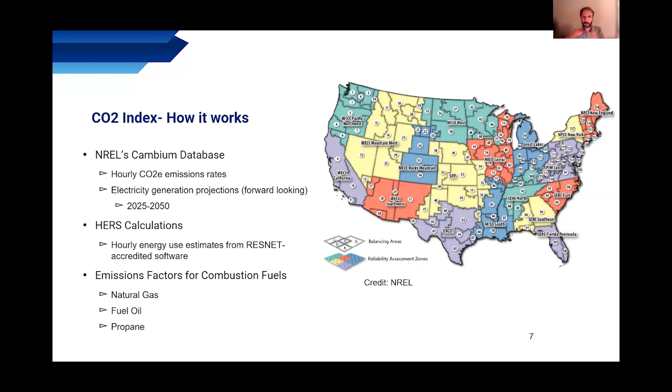So I see there's a mention here of forward-looking under NREL, 2025 to 2050. Yeah. Is the intent similar to how you might project out energy costs, like we get those projections into the future for mortgages and stuff?

Is that to say, hey, if the grid continues to go the way it is, it's going to reduce energy? Yeah. So when you look at the Cambium database documentation, you'll see they have a number of different scenarios. So in terms of what we use for the CO2 index, we use the low renewable energy cost scenario, and we use the levelized month-hour long-run marginal emission rates.

So the long-run marginal emission rate for CO2 is the forward-looking projection. They're anticipating under a number of different scenarios, including high-cost renewables. Maybe renewable energy is not going to continue to decrease, but say it increases. They use these different scenarios to estimate what the emission rates will be under any given set of circumstances. So for example, if we chose to use the short-run marginal emission rates, we would essentially be predicting CO2 emissions based on the current makeup of the grid.

So what the Cambium database does is project out under different scenarios what the grid may look like in terms of the makeup of different fuels, whether it's natural gas or nuclear or various different types of renewable energy. What does the grid look like, and what's the impact on the emissions based on that? So in our case, we're using the 2021 Cambium database, and we also include both the pre-combustion and the combustion in the CO2 emissions. So pre-combustion is going to account for extraction of, say, natural gas, processing, and transport. And then, as I mentioned earlier, the 134 regions that they refer to as balancing areas are included in that.

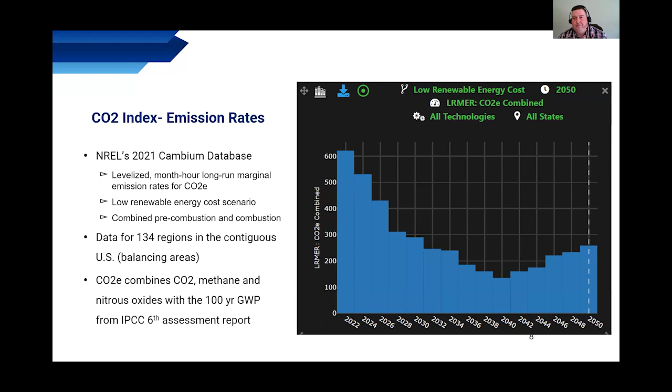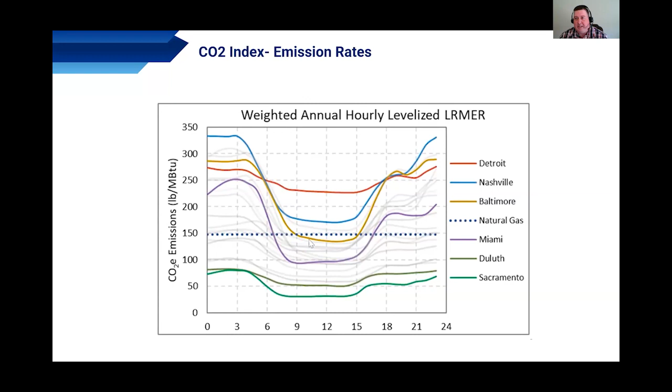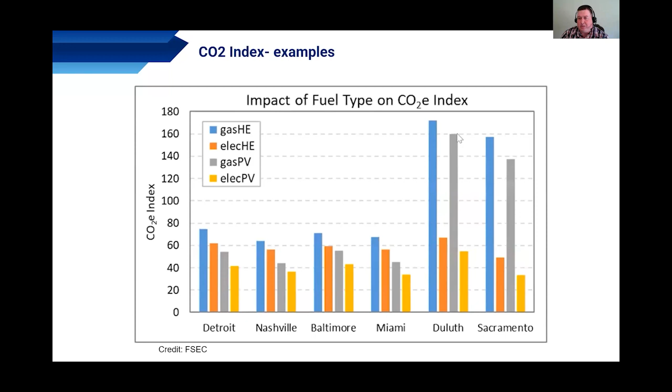And so when you add in the natural gas component, which you saw right across the middle at 150 pounds per million BTU of CO2 emissions, you can start to see how the use of natural gas in those areas that have rather efficient grids in terms of CO2 emissions really significantly increases the impact on the CO2 index. So this is an example that was modeled by FSEC in terms of actual implementation.

So RESNET software is still implementing the CO2 index. I expect that it will probably be... we can go look and see how these homes are performing on the CO2 index, because it is going to be required to be included on the rating certificate for every rating.

So it will be a data point that we have on every HERS rating in the registry. And essentially, to calculate the CO2 index, it's the CO2 emissions of the rated home divided by the emissions for the reference home times 100, and that gives you your CO2 index.

Now, I also want to point out this new rated home label on the right side of the screen. RESNET just launched this in March. It's available for every home in the RESNET registry, and it'll give you your index scores for the HERS index, for HERS H2O for water, and also the carbon index. And it'll also identify what ratings and certifications the home has.

And also, I noticed a few of you from Passive House. The PHIUS certified project will be a certification that's added to this. It's been added to the label now, and it should be implemented fully within the registry in a few months. So for homes that have achieved the PHIUS certification, that will be included on this label as well.

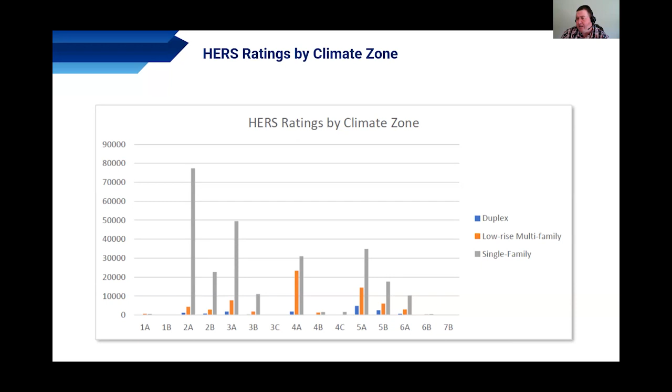So again, we're looking at duplex, low-rise multifamily, and single family, with the largest number in one climate zone going to be 2A, and a significant percentage of ratings within climate zones 2 and 3. So in general, HERS ratings are going to follow the trends in new construction. Where there is a lot of new construction happening, there tends to be a lot of HERS ratings. One data point I don't include here is the breakdown of new construction versus existing homes. Typically 95% or more of HERS ratings are on the new construction side.

Yep. That's really surprising. But overall, what's the nationwide percentage? So nationally, if you look at the number of ratings against the number of permits issued, I think it's around 20 to 25%. The reason we do this analysis based on permits is because it's readily available data from the Census Bureau. It's not the perfect comparison though, because a HERS rating gets submitted to RESNET when the home is finished, versus a permit obviously comes before the home has been started. But we've been using it for several years because the data is readily available.

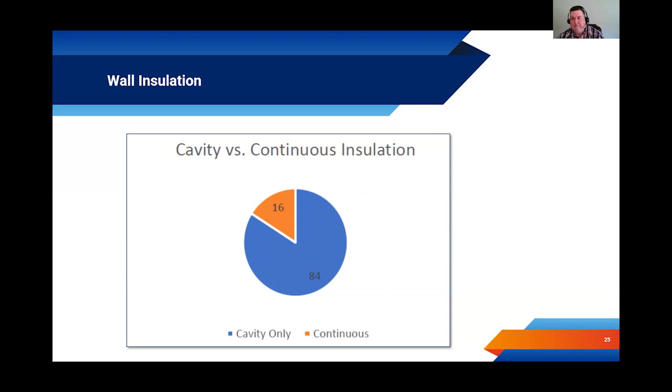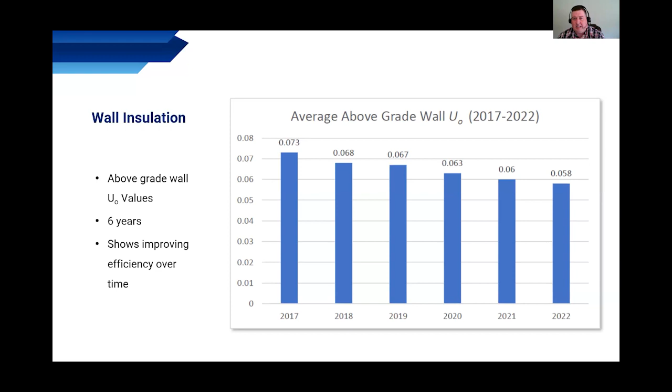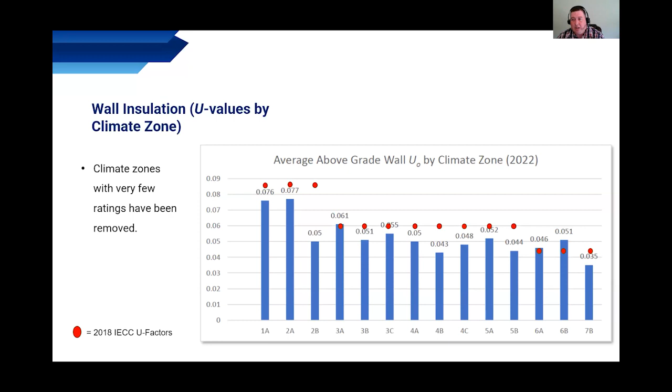Here's a similar look, but this is breaking it down by climate zone. The red dot that you see on each of these columns is going to be the 2018 IECC U factor requirement from Chapter 4. I've provided that just as a point of reference because we're looking at an entire climate zone. We don't know what specific state they may be in or what code might be in effect when this home was built. But this is just a look at where the average wall U value falls in the different climate zones and in comparison to what the code would require in that climate zone.

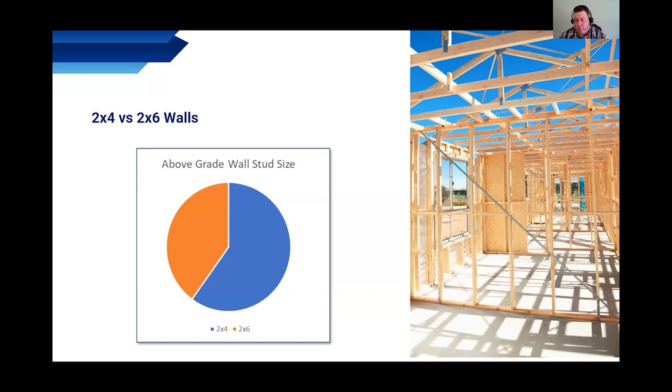Here's a look at ceiling insulation. Again, the red dot is the 2018 IECC requirements. This is a breakdown by climate zone. For these climate zone graphs, where there's a climate zone that has very few ratings, I think we did 100 or less, we've just excluded that particular climate zone.

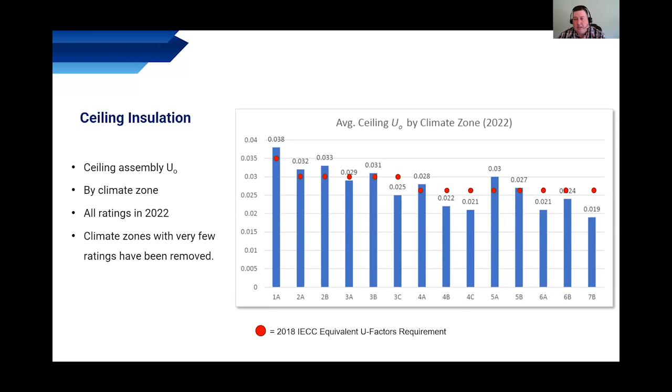As a point of reference, for climate zones 1 and 2, all the way over on the left, the IECC code requirement is going to be 5 ACH, and for all the other climate zones, 3 plus, it's going to be a 3 ACH requirement in the code.

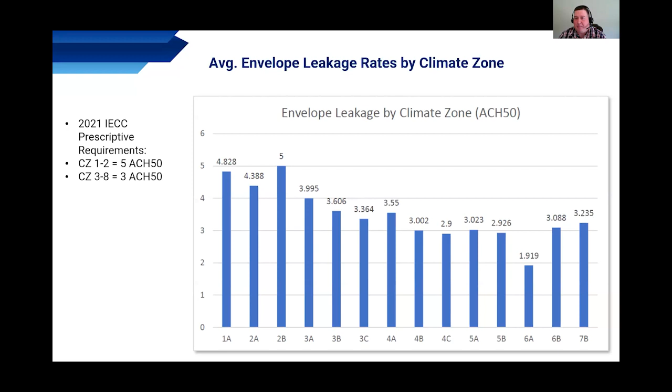We also look at ventilation systems. So here you're going to see a breakdown, blue single family, orange multifamily. The most popular ventilation type was just exhaust only, followed by supply only. But the third one is CFIS. So that's a central fan integrated system, where you have your ventilation system connected to your air handler in some way. We used to call it air cycler in the registry, but that's a proprietary system, so we've changed it to the generic term now.

But I think one of the most important things to note in comparing 2022 against 2021 is that in 2021, the second most common ventilation type was none. So we are at least moving in a direction where we're starting to better address ventilation. At least the raters are including something as opposed to just saying there's no ventilation.

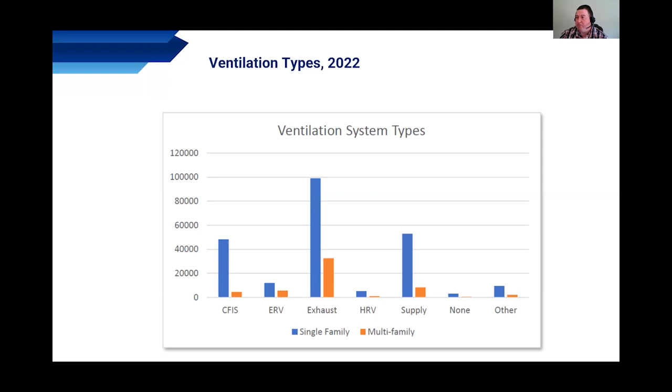For CFIS, is that balanced ventilation, as in it's bringing in as much fresh air as it's exhausting? Because otherwise, the way you described it, it sounds like it's just a supply system on the furnace. Yeah, that would be a balanced system. We do have another data point in the registry for a balanced system, but in terms of what gets inputted, I wouldn't say that every CFI system is balanced, but that is the intent of those. We do have a separate data point on balanced, but in the process of rebuilding our registry over the last year, I didn't feel confident in that data point, so I didn't include it here.

And that's balanced non-recovery, right? Right. You mean that's an additional item? Okay. Yeah. Interesting. That's not one term I've ever heard. So thanks. Yep.

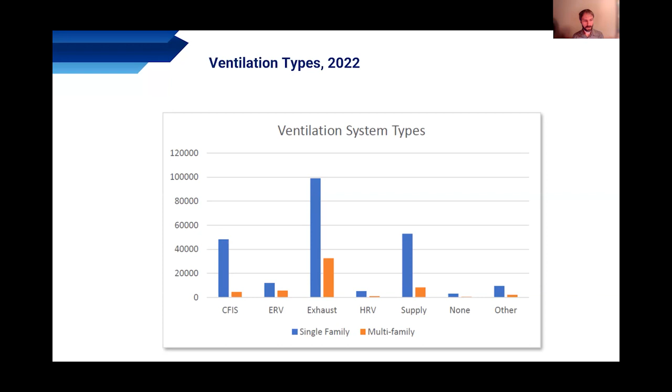Furnace and air conditioner efficiencies. So for furnace efficiency, about 45% of homes that had a fuel-fired furnace used a standard efficiency furnace, meaning less than a 90 AFUE. And on the air conditioner side, we've seen the similar trend that we've seen for several years now, which is 14 and 16 SEER tend to be the most commonly used air conditioner efficiencies.

15 has actually grown a little bit, although I've heard that 15 is more commonly used on the retrofit side. Not sure how true that is, but 14 and 16 SEER seem to be the most common as far as single family.

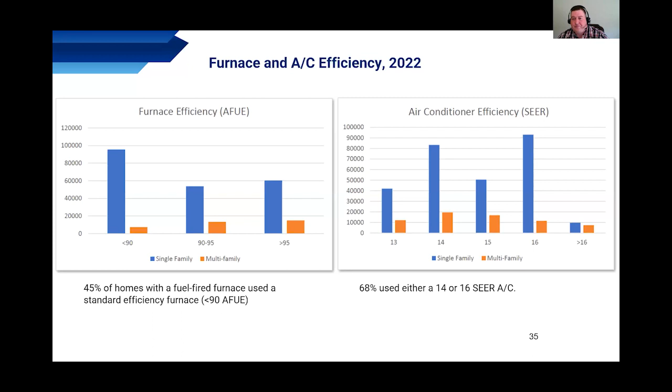And the same thing if we went and looked at where the high efficient ones are installed, and you can see that the high efficient furnaces are getting installed in the cold climates, which obviously makes sense in terms of energy impact.

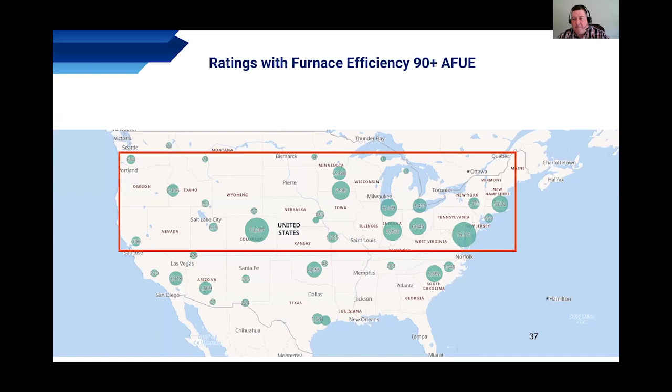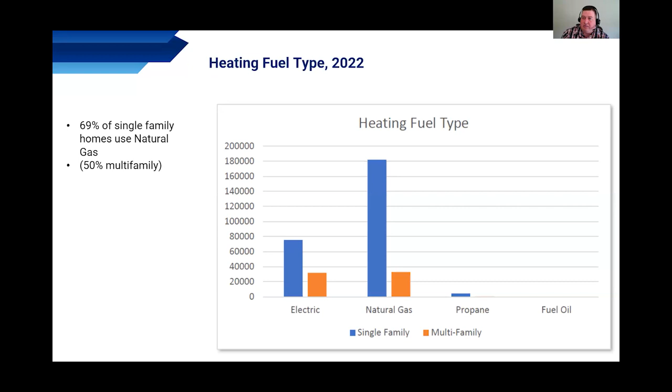I think just between 2021 and 2022, the percentage of homes using a natural gas heating source decreased by about 6%. So you're definitely seeing a trend toward electric and away from natural gas. I think just a few years ago, about 80% of heating fuel type was natural gas.

And we've looked at this from a number of different angles. Back in 2020, the 2020 HERS data trends report included a special section on net zero analysis. And so we got into more detail there in looking at what the fuel and equipment trends look like as we get to homes that are achieving or very close to achieving a net zero rating.

So we did look at all electric homes as well. There were just over 64,000 homes, and that's actually the 2021 number. The 2022 number is actually significantly higher. It's about 20,000 more than that. And there were 83 all-electric homes in Michigan in 2022. The 2022 split for all-electric homes is actually about 20.5% of all HERS ratings were all-electric last year.

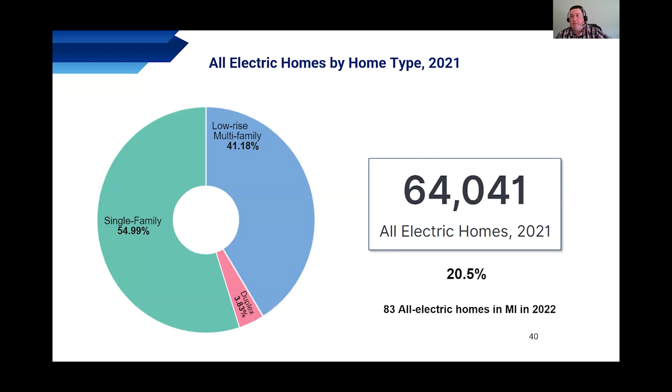So we also look at the use of solar. California, although they come out very low in percentage of homes receiving a RESNET rating, they come out on top in terms of the number of homes using solar. This is because of their new construction requirement for builders to use solar.

In total, there were about 7,700 homes that had solar installed. The average HERS index score for homes that had solar was a 22. The average HERS index before accounting for solar, so just the efficiency component, was a 48 on average.

So that was everything on HERS. I'm going to just do a couple slides here on HERS H2O. If you're not familiar with it, HERS H2O is a whole house water efficiency rating. It's built on RESNET's ANSI Standard 850. You can use HERS H2O to achieve the WaterSense label under version 2 of WaterSense.

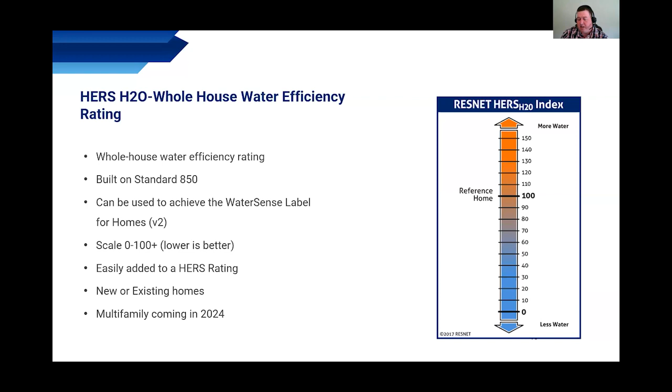The final inspection for HERS H2O can be done at the same time as a HERS rating, and there's no pre-drywall component to the HERS H2O. It's just a final inspection. It is applicable to both new and existing homes. But currently, as far as multifamily goes, this current standard 850 only addresses one and two family dwellings. Multifamily is going to be incorporated in the second version of that standard, which should be out in 2024.

In 2022, we had about 2,200 HERS H2O ratings. 2022 was actually the first full year of doing HERS H2O ratings, which launched in 2021. The average HERS H2O score was a 61. We have currently 26 RESNET accredited HERS H2O providers, and very close to 300. I think now that we're halfway through 2023, that number is a bit over 300 in terms of HERS H2O certified raters.

And then lastly, I want to wrap up with the 45L tax credit and some mortgage incentives. So the 45L tax credit has been extended through 2032 under the Inflation Reduction Act. The tax credit available is $2,500 per home. That's for Energy Star single family homes. That took effect in January of this year. If the home is certified for Zero Energy Ready, you can get $5,000 per home. Again, that took effect on January 1.

The nice thing about the extension of the tax credit is that for the first time, builders can really start to bake this into their planning process. In the past, 45L has almost always been extended retroactively. So builders never knew going into the year if Congress would reauthorize 45L for that year or the previous year. So they couldn't really account for it so easily within their planning process.